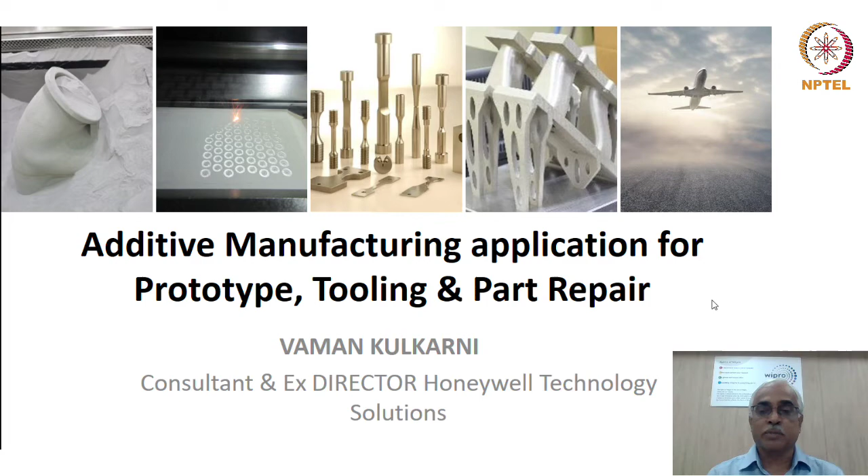That has been my involvement in additive manufacturing for the last 6 years, and we made significant progress in developing the additive manufacturing technology. Before joining Honeywell, I was with DRDO, the Gas Turbine Research Establishment, for 21 years, involved in developing the gas turbine engine, the Kaveri engine for LCA applications. That's my brief background. Today's topic is additive manufacturing applications for prototype tooling and part repair.

This has been one of the key areas where additive manufacturing has been very widely used. In fact, that's why I like this staircase model from Renishaw, which shows that at the bottom we have the rapid prototyping tooling. That's where the application of additive manufacturing started way back. And with a lot of improvements which have happened in metal printing, it has taken a much different shape in taking advantage of the functional prototypes, the tooling, and then the part repair applications.

It's across the industry. It could be in aerospace, automobile, or medical. So it's across the field. It has been a significant part of it. Additive is also today used for a lot of production applications, whether it could be a direct part replacement or consolidating the parts or doing new product development as part of the design for additive manufacturing benefits that additive brings in.

As part of the prototypes, typically the name rapid prototype has been very widely used for the last 20-25 years. But rapid prototype need not always be with additive manufacturing. Rapid prototype means how quickly we can make the prototype and then quickly do some of the functional checks, which helps to finalize the design very quickly or do some design iterations. That's where the prototype has been very widely used.

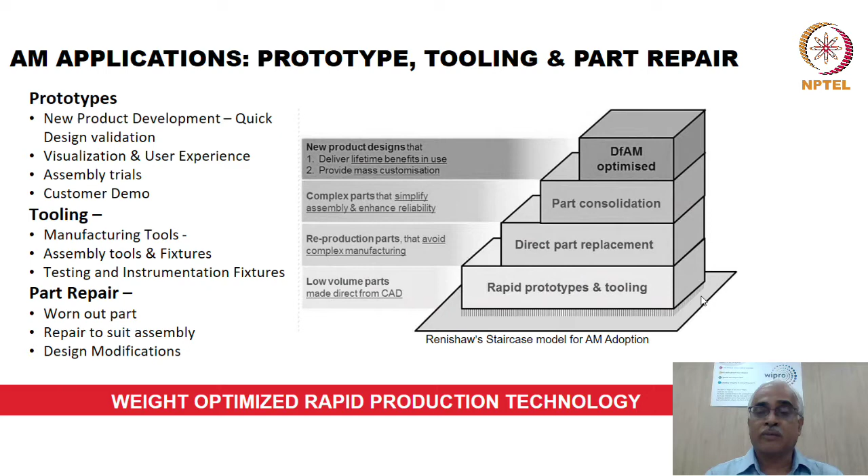So we will look into all these three areas where this additive technology is and how it is being applied, and there are some good examples where we have deployed additive manufacturing in all these three areas. So, before we get into that, what benefits does additive manufacturing bring? When I talk about additive manufacturing, mainly our focus is on metal printing. That's been our main focus.

So, definitely, with the advent of metal printing, we are able to design very complex parts with additive, which helps in improving the performance and life, and it could be lightweight. So those are the things which additive manufacturing enables, whether it's part of prototype or it's part of the tooling

or the part repair. It also empowers the designers to consolidate the parts into a single design. It removes a lot of constraints which used to be there while designing a part, keeping the manufacturing constraints. So most of that is eliminated because of the process of additive manufacturing itself, which is building the part layer by layer.

Additive definitely reduces the cycle time because there is no need for the tooling, and assembly time is also reduced because we can consolidate all the parts. It's an ideal solution for very complex parts where there is a low volume, which is the case with prototypes. And there is no lead time involved to get the materials because the powder which is used is already either in stock or we can get that powder very quickly.

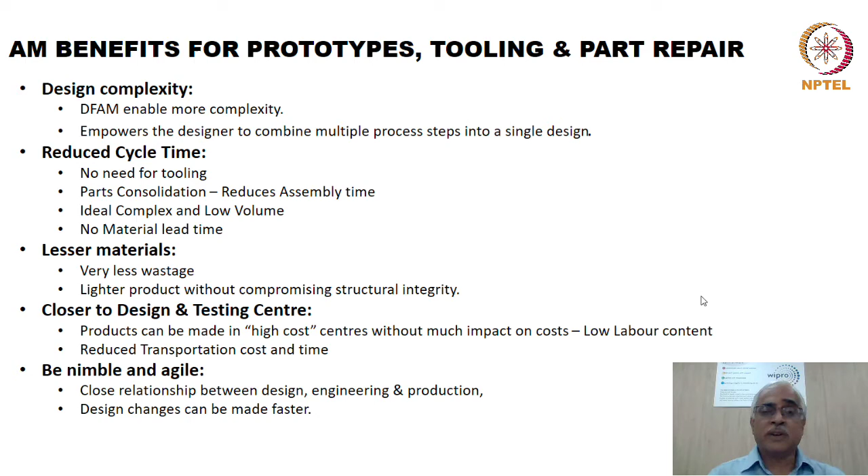The additive manufacturing process itself is very agile. Very late design changes could be incorporated very easily, and the part can be produced. So we can be more responsive to the customer changes and customer requests, and we can incorporate that into the designs. So all these benefits will definitely help as you get into the prototypes or tooling or part repair.

There are still quite a few challenges with additive manufacturing technology. These challenges could be in terms of achieving the final accuracy, dimensional accuracies, geometrical tolerances, the surface roughness. All this is decided by the powder size, the quality of the powder, the layer thickness. So it still needs some sort of post processing to address the final finish. But still, it could be done much faster than the conventional. But these limitations still exist.

Similarly, the quality of the part which is built still needs to be consistent and reliable. The quality of the part is affected because of the residual stresses or the distortions which could happen while printing. So these things cannot be accurately predicted. So it needs to be validated, especially when you're building larger overhang parts. There could be some warping issues which need to be addressed, and supports may need to be optimized. So there is still manual intervention and some sort of trial which needs to be carried out.

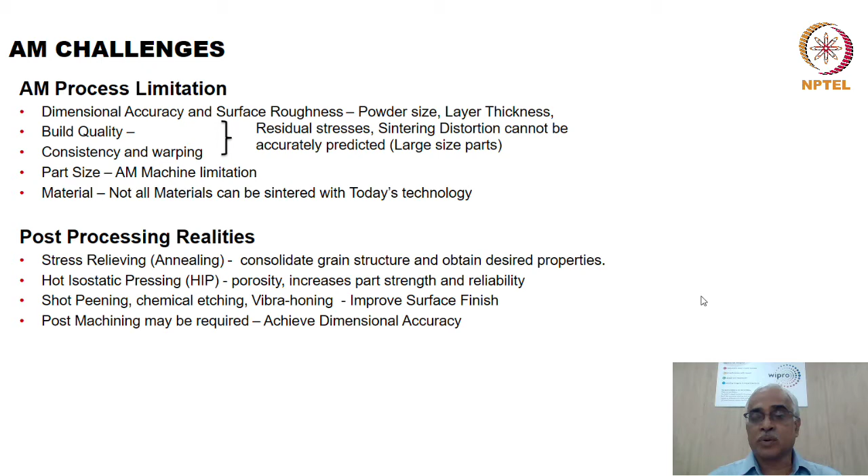When you say review, the design is validated for the performance, for the assembly; it will undergo some of those trials as part of the review, and then you go back and refine the design, and then you do some iterations to finally have a build which can get into the production. So this is in a nutshell how the rapid prototyping process looks like.

The prototype could be for the proof of concept, or it could be a demo model for both internal and external customers, and it also gives a visual feel of things, and you can also validate all the functionalities for which the product has been developed, and it could be also for the aesthetic purpose, how it looks, because that plays a big role when you have to get the product into the market.

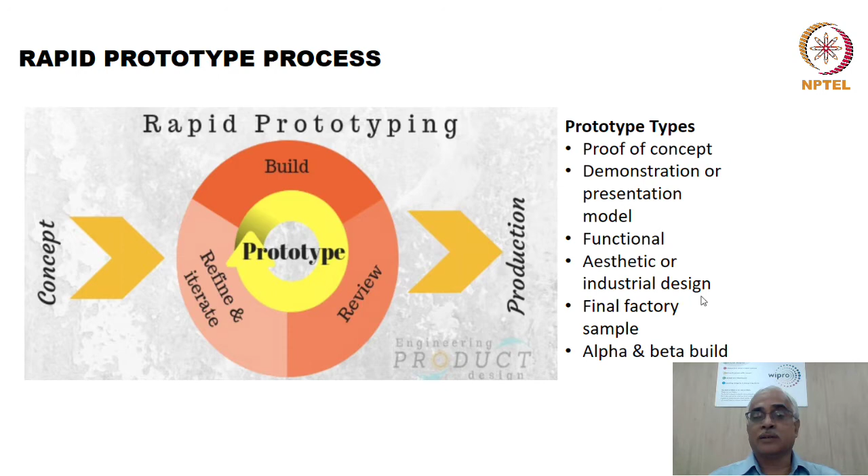Or it could be the initial test builds which you release like alpha or beta versions. This could be for the hardware or software. The word prototype is applicable across. So in our scenario, we specifically are looking at the mechanical parts as our focus.

What benefits does AM bring when you look at it for prototypes? One of the key things AM enables is quicker performance evaluation. So we can have the design converted into a product on which we can do all the functional tests, whether at higher pressures or temperatures. Even if you are not using the original material, it can still be tested for all those functionalities.

It may not withstand the life for which the product is designed, but it can still be evaluated for all its performance. So that helps to quickly validate the design, do the design improvements, and then quickly build the parts and test them. I have a few examples where you can see how it is really reducing the cycle time by more than 70%.

AM is definitely a cost-effective solution for building prototypes because it's a completely automated process. There is very less labor involvement in building the part, and of course no tools are required. We can get complex parts with extremely precise dimensions because it's directly converted from the CAD models. Material wastage, as we talked earlier, is nil.

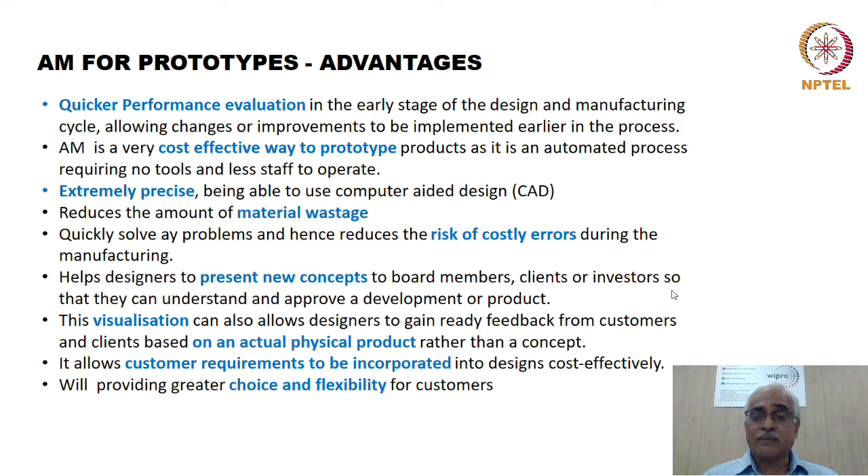It also helps with any inputs which come from the customers very late in the design phase; we can incorporate that into the prototypes and then validate it. So it really has that flexibility to produce the parts.

The applications of prototypes: I talked about new product development. It plays a big role. We can do very quick design validations. Design for assembly, we can validate the assembly checks. We can take it to customer demos, and any maintainability related things from the user experience point of view. All that can be validated very easily with these additive prototypes.

Sometimes we need the prototypes to take to the customers, which helps our marketing and sales channel to win businesses. So we can quickly modify the existing product for the new opportunity and quickly engage with the customers, so that helps in the whole business win process. It also gives a lot of inputs when we start preparing the bids, both for the technical as well as the commercial piece of it.

We can use these prototypes to have both the technical feasibility as well as the commercial validations. Even before the final engagement, we can give those demo pieces to the customer so that he can evaluate it, and then get the confidence of the customers.

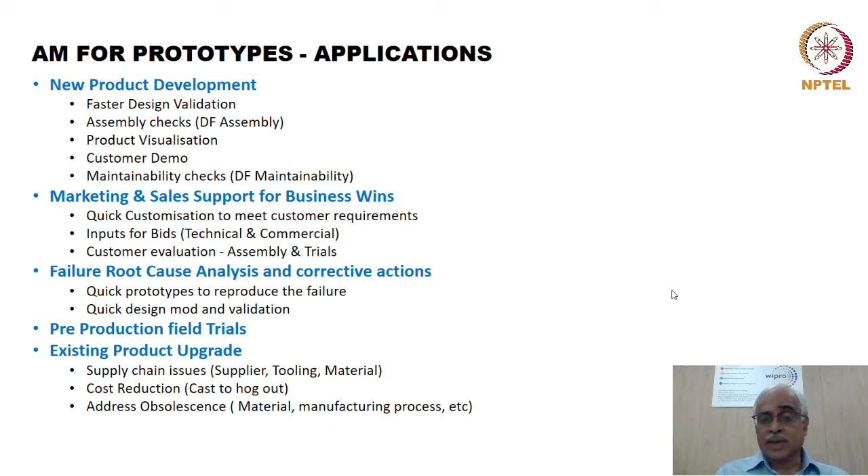And in some situations, because of the longer life cycle, we may want to reduce the cost of the product, because the old design has gone through a costly manufacturing process of maybe a casting or a forging. So with present technology, it may be easy to either do it through additive or through hog out. So we can do those design validations with these prototypes. And in some cases, the part could become obsolete either because of the material itself or because of the older manufacturing process. So those are the areas where additive brings a lot of benefits and advantages.

So in the next few slides, we will see a few examples of prototypes and how they are benefiting the industry. You can see here a high pressure turbine blade. Typically, most of these high pressure turbine blades have a complex airfoil, and they need to be internally cooled to withstand the very high temperatures. So in the design process for these, we do all the thermal analysis, the flow analysis, the CFD analysis, and come out with a design.

To manufacture these blades could take anywhere from 6 to 9 months, and then you have to test it, which could take another 4 to 6 months, and further, if you have to make any design changes, it's a cycle of 1 to 1.5 years we are talking about. Typically, to finalize this type of design, it takes about 3 to 4 years. But with additive manufacturing, we can have this part available in less than 8 weeks.

And this one was specifically with Honeywell. We went through 4 design iterations, and in those 4 iterations, we could validate the design. The final production is not done through additive, but the prototypes are done through additive, and then all the validations and tests are done, and then it is released for production. So it has reduced the cycle time from 3 years to about 8 weeks for the entire 4 design iterations, and the cost savings is also more than $500,000

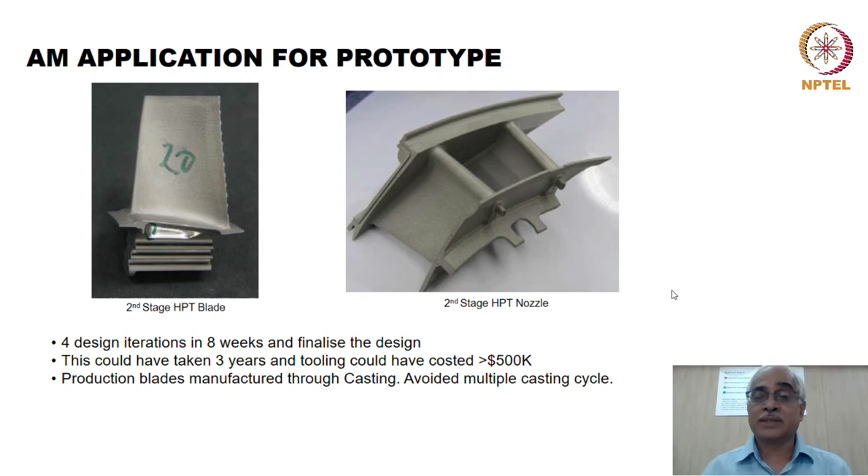as part of this product development. Same thing with the high pressure turbine nozzles. You can see the complexity of the part involved. So additive is used for prototyping. It can finally be a process even for the production version, but that also depends on a lot of validations and certifications involved.

The next one is the TOBI nozzles. TOBI nozzles are the tangential injection of the cooling flow on the turbine blades at the right pressure and temperature. So that's the criticality of these TOBI nozzle designs. So we could quickly get these manufactured through additive, and we can take them to testing.

So the one which is printed through additive may not have the life what we are looking at, but we can take it to the next assembly like engine testing. So we can do those validations even at the engine level. So that way, the overall cycle time for the overall engine development we could reduce it. So if we had gone to the conventional approach to make these parts available, it could have taken around 9 months.

So all in all, there are quite a few other models what you can see here as part of the prototyping. The typical cycle time in an industry what we can reduce is close to about 70%, and we can have a cost reduction of about 65%, and then we can do more design iterations and have DfAM things completely addressed through the additive manufacturing.

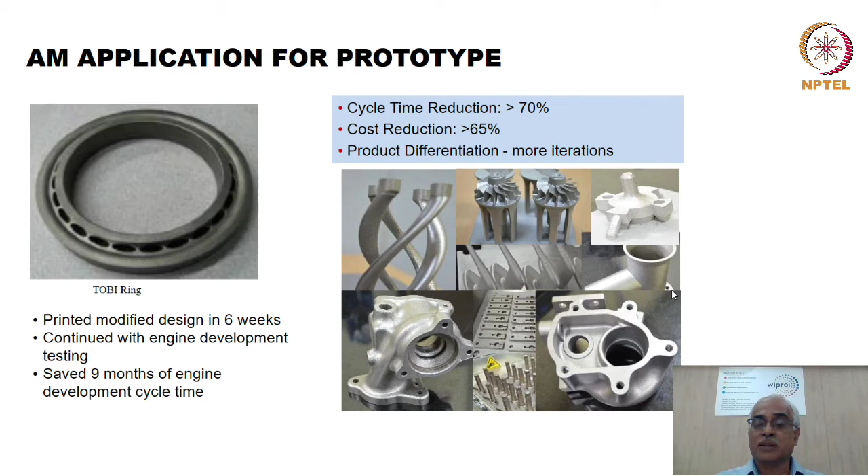So in many cases, we don't make the prototypes with the actual material. We can make it out of polymers or the plastics. So there are some examples which I'm showing here. On the right hand side, you can see that this is for the solenoid. The coil winding is the critical thing for the solenoid. We can do the winding trials on a polymer bobbin, and then do all your winding trials and then finalize it, and then reproduce that on the final part also.

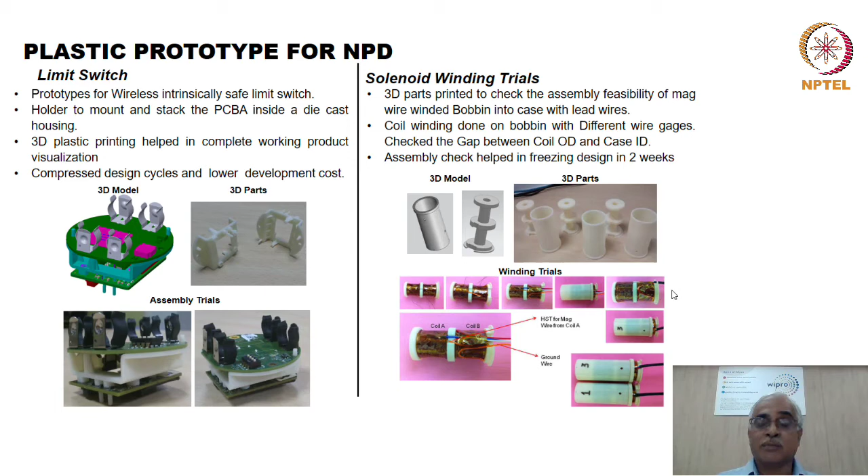Similarly, you can see on the limit switch where the PCB assembly is stacked, and you need to check those quick assembly trials, we could quickly make plastic parts and then assemble it and then check it and finalize the design. So that way, although it's a non-functional part, it helps in finalizing the design from the assembly and design validations.

Coming to the tooling, tooling is another big area where additive can play a big role. The reason why the tooling application is wide for additive manufacturing is the tooling is not getting into the final product, so we can keep the tooling design in mind, considering the overall product applications, and then there is no need for any additional qualification or certification of the tooling itself, similar to the prototypes.

But most of the cases, the tooling what we talk about is the tools which are required either for the molds or the dies in a casting or a forging process, or the tooling could be for the assembly fixtures, or even when you are doing the conventional CNC milling or drilling, you need to have those fixtures to hold the part. So you may require those tooling, and some of those tooling requirements will come very late, and it could take time if you go through the conventional approach.

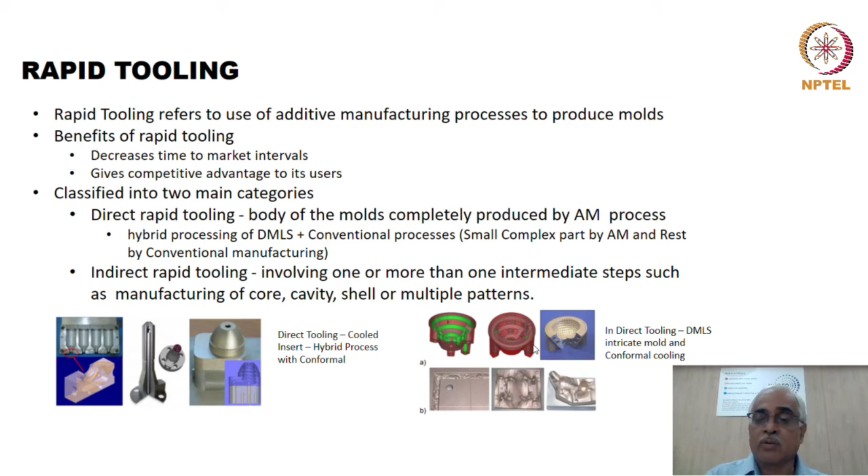Similarly, you can see here an example of an intricate mold, which could be done through the conformal cooling in a much better way, which reduces the cooling time as well as gives uniform cooling, so that we get a better quality of the part.

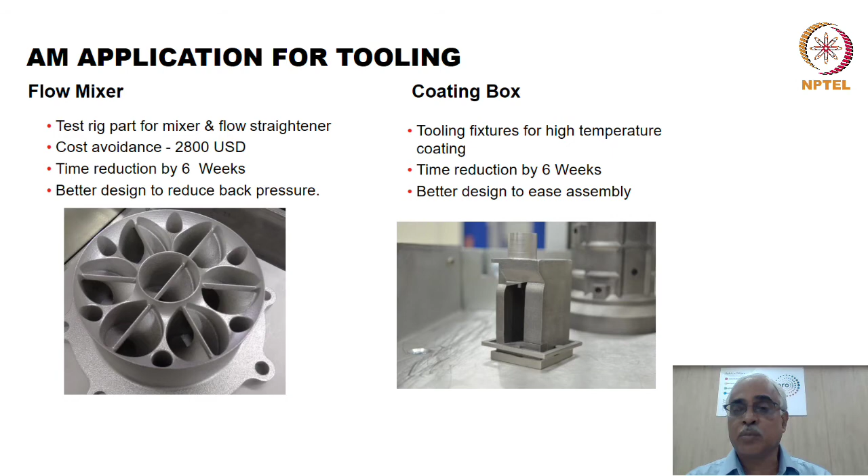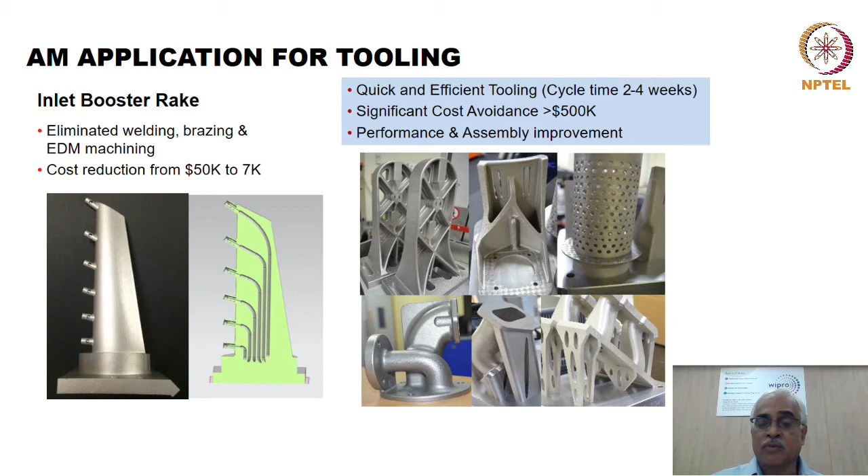And a few more examples are shown here for the tooling applications. Typically, we can reduce the cycle time by more than 4 weeks, we can also reduce the cost, and we get better performance from the tooling. So, since we are using additive for these toolings, we can take benefit of this additive.

This is a typical application for conformal cooling. When we do mold designs, we always keep in mind how that mold can be produced. With conventional machining, we can only have straight vertical or horizontal holes. We cannot have curved holes, and because of that, typically the cooling time cannot be optimized.

We can come out with complex conformal cooling channels, which otherwise are impossible to produce using the conventional approach, which helps the quality of the product by having a uniform temperature. It reduces the cooling time, so it increases the production rate, and the tool life also increases. We can optimize the design, validate it through the mold flow software, and then finalize the mold design.

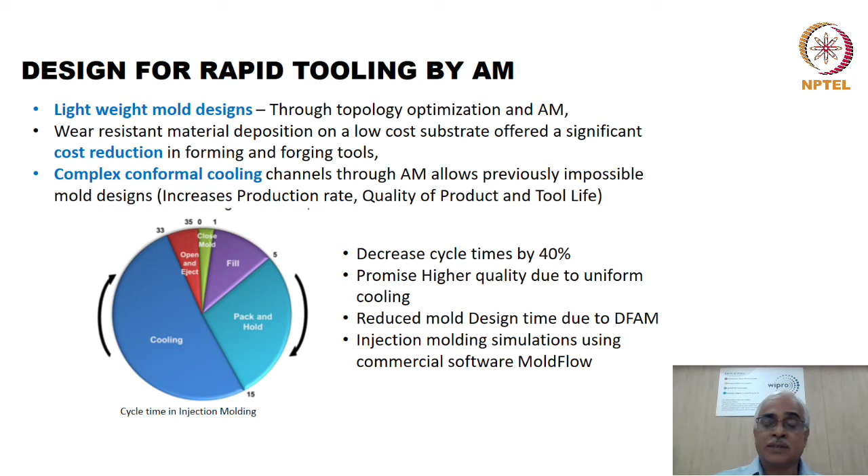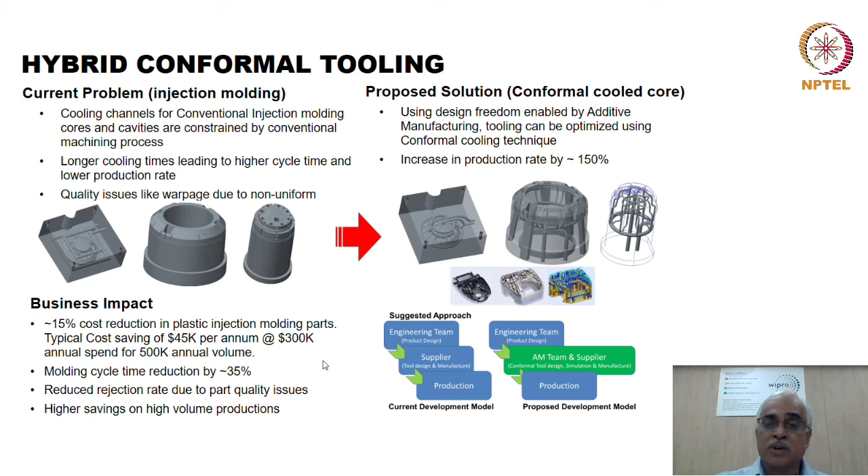The third topic I want to touch upon is using additive manufacturing for repair and restoration. This is not a new thing; it is already in use in many applications, whether automotive, marine components, or aerospace components.

We refurbish the part to new conditions, and then it can have an additional life incorporated. Examples are, for automotive, it could be an engine block, or it could be some defects which would come into the engine blocks, and then that needs to be addressed. Or it could be marine components like the crank pin journal, where it could have a lot of cuts, ridges, and grooves, and then it needs to be ground and finished.

Or an aerospace part, like a landing gear, or flight control actuators, or gas turbine engine parts like turbine blades or compressor blades, which could be worn out near the leading edge. So those are the areas where we can deploy this repair.

The additive manufacturing technology for repair has mostly been around directed energy deposition, which is more like laser cladding or laser metal deposition, which has been in use for the last 15 to 20 years. So that's what has been largely used. But in the recent past, with a lot of improvements happening in DMLS, EBM or SLS technologies, powder bed fusion has been extensively used for repairing parts, especially complex parts.

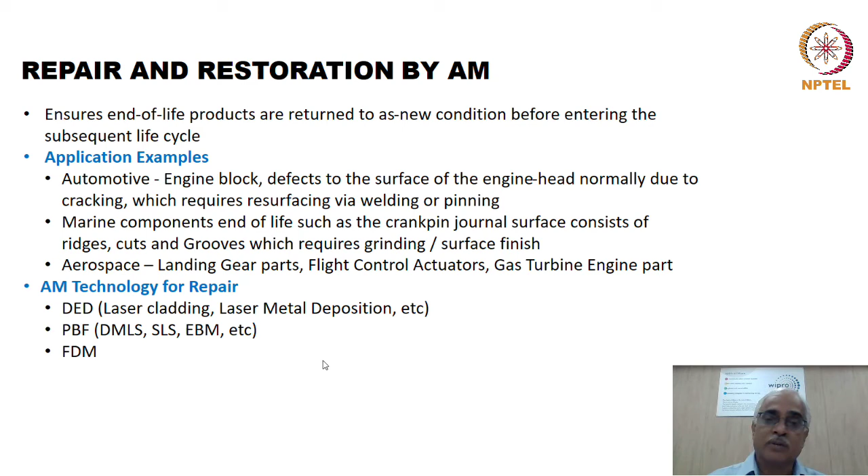It is much easier and can be done in a much more precise and accurate way. And for most plastic parts, FDM is the one which is used, for polymers and plastics. So those are the technologies which are being used. So what we need to consider while we decide AM for part repair?

One is we need to decide which technology you are going to use for repairing, whether it is powder bed fusion, FDM, or directed energy deposition. That depends on the type of repair you want to do, and what capabilities each of these AM technologies offer today. We also have to keep in mind what is the material of the original part. Typically, high cost new metals, and when you want to do it manually, the inefficiencies involved. So those are the parts which you consider.

So we need to keep in mind both the product as well as the material which is feasible to repair the additive way, and which material you are going to use for additively repairing the part. Today, these are the materials: Inconel 718, Inconel 625, titanium alloy, stainless steel, and aluminum. Those are possible today with additive manufacturing. So we need to decide which material we are going to use to repair the part.

We also need to decide on the AM machine itself, and the settings, what is possible. So all those things you have to finalize, and you also have to consider the geometric complexity of the part in deciding which is the best process and what can be achieved. In most repair activities, there's pre-processing involved for object preparation, and then we have to do computational preparation to have the 3D model done.

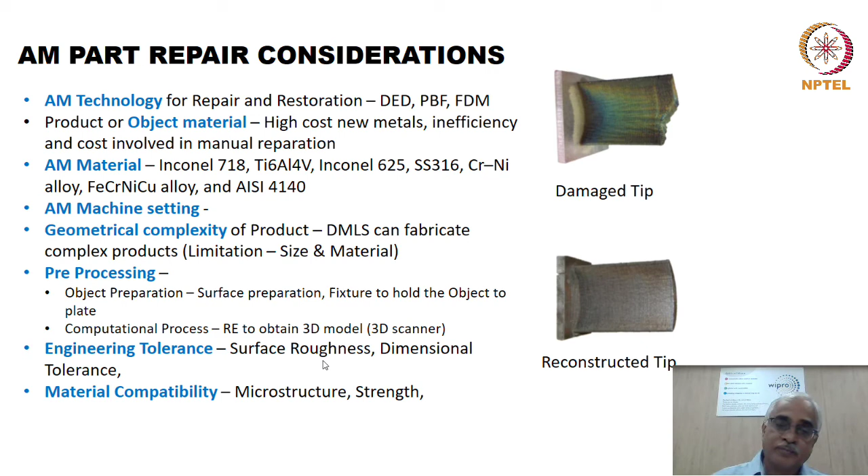What are the challenges for part repair using additive manufacturing? The process is still getting evolved, validated, and deployed. A few challenges you typically come across while using additive for part repair: we need to build the model through reverse engineering. That's the key thing, to capture all the details, and sometimes it may create an issue while building the part.

Then when you want to produce these parts, we need to have some fixtures, and zero alignment of the machine and the CAD model in all the axes. So we need to have some trials done before we can use it for production. Material definitely is an issue.

How good is the pairing of the object material and then the AM material? If it is the same material, then the problem is a little less. If it is a different material, then we need to understand the bonding between those materials and then validate it. And the material property itself, when compared to the base material, on the AM material properties as well as the property at the interface. So those are the things which we need to do a lot of testing and validation before we say that yes, additive is a thing we can use for repair.

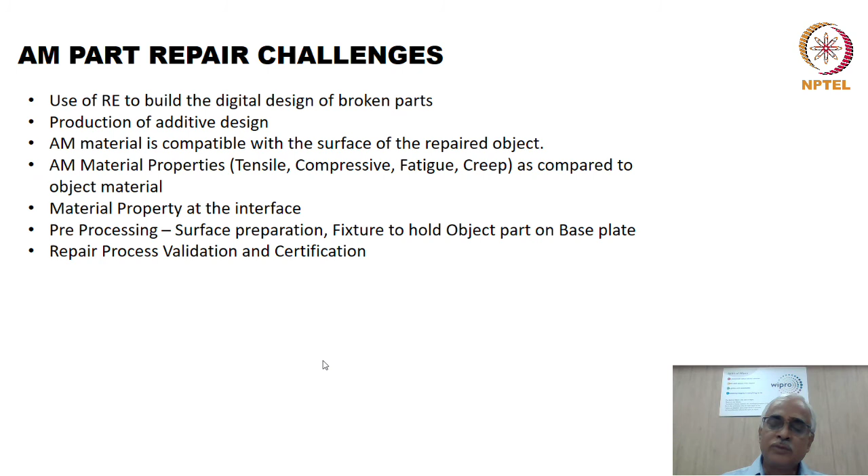We also faced quite a few challenges in designing the fixtures to hold the part with the accuracies that are needed, so the fixture needs to be flexible and adjustable so that we can address the challenges. So that could add a risk. But nevertheless, additive has now been very extensively used for many of the part repair activities, especially the worn out parts. May not be the safety critical parts, but in all other areas it's being very widely used.

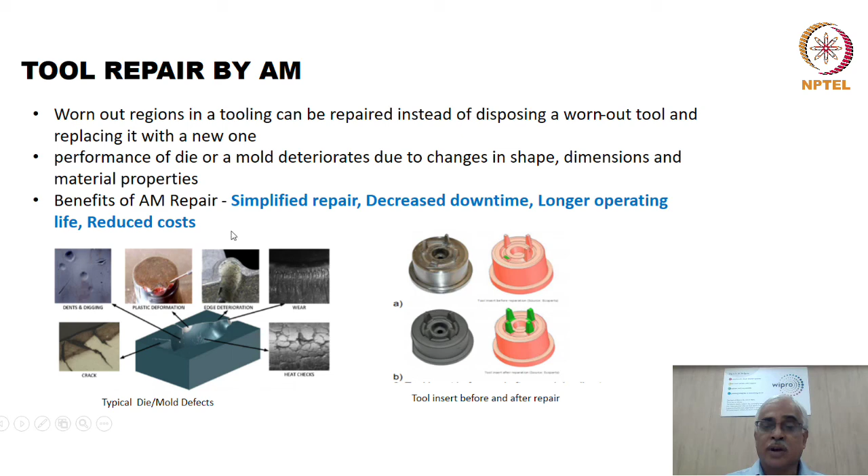So you can see the type of defects which you can see in a die and a mold in the picture. Those are the defects which we can repair using additive manufacturing and then fix it. You can also see the tool insert here. One of the things you can see is broken off here, and because of this, you have to completely discard the tool and then remanufacture this tool. Whereas in an additive way, you can rebuild that and then reuse it. That way it will decrease the downtime. It will reduce the cost. So that's what additive is helping as far as the tooling is concerned.

The other way, which is the extension of this part repair process, is incremental printing. You already have a product, and in terms of critical performance it meets the customer requirements. But for assembling into the next level of assembly, it needs some changes. An example here is the turbocharger. The turbocharger housing, especially the end flange, which gets assembled onto the automotive engine, needs to be changed. But the basic other features of the turbocharger are not changing. This is typically made out of a casting, and to make a casting of this housing and get that complete assembly done, it could easily take 3 to 4 months, even if tooling is available.

So we can take the existing housing, chop off the existing flange, and rebuild on top of that what the customer wants, so that we can provide the customer demo very quickly, and then he can do the custom assembly and the initial field trials with this. So we could quickly provide this prototype to the customers in about 3 weeks, and then they could do the trials in maybe the next 2 to 3 weeks and give feedback. It also helps to have early customer engagement. So this type of incremental printing as an extension of the part repair technology could be very efficiently deployed and used to create differentiation with respect to our competitors.

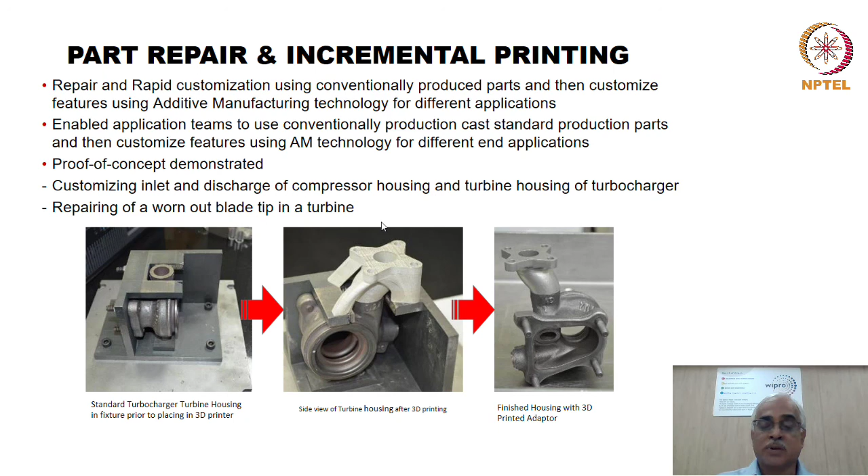So with that, I will come to the end of this session. Additive is already playing a big role as far as its application for prototype tooling and part repair is concerned, and with a lot of technology improvements happening in the area of metal printing to address some of the challenges which may be there, it's going to be a big game changer in the next 3 to 4 years. We can quickly come out with a product using AM prototypes. Any tooling needs we can quickly address, and for the products which are already in the field, we can increase their life through part repair.